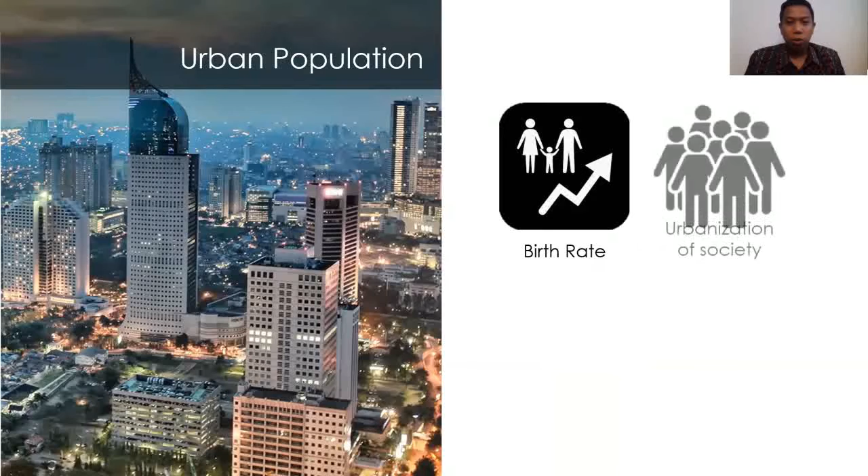Introduction. The increasing quantity of urban population is not only caused by the high birth rate, but also the urbanization of society. With a high population, it will result in an increase in the volume of waste generated from homes. Egg tray or egg packaging is one of the easy-to-find household wastes, which is generally made from recycled paper waste in Indonesia. This condition is due to the highest amount of waste being in the category of paper waste and paper-based waste.

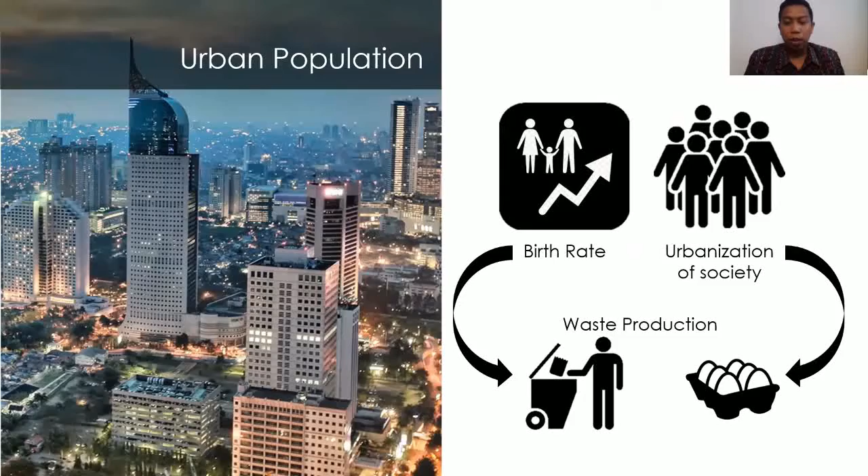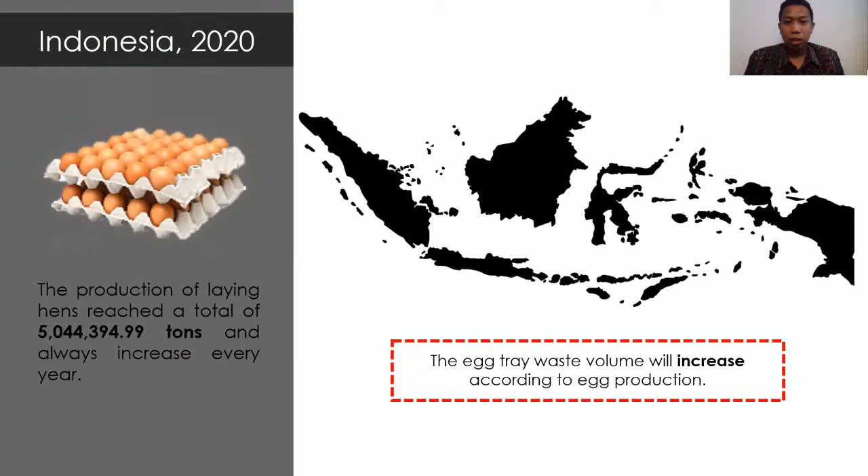Based on data from the Central Statistics Agency, the production of laying hen eggs in Indonesia in 2020 reached a total of 5,044,394.99 tons. This figure does not include the production of native chicken eggs and duck eggs, which also always increase every year. This condition has shown that the use of egg trays will increase based on the demand for egg production, which in turn increases the volume of egg tray waste.

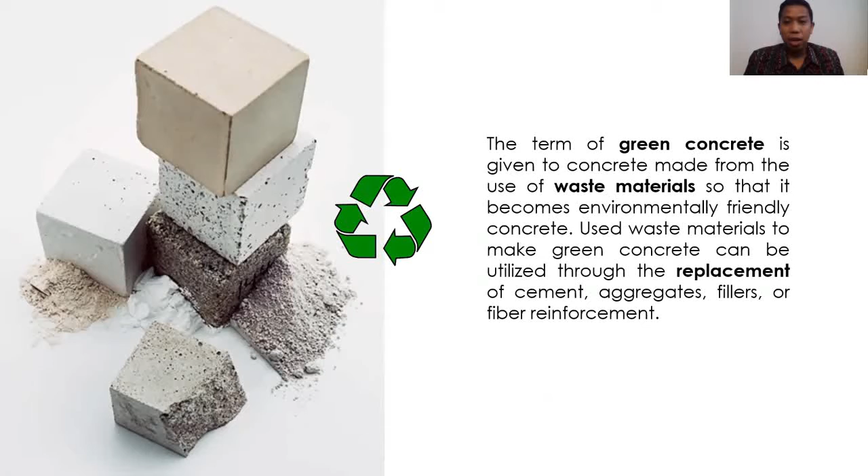The utilization of waste material as construction material has become a special concern, one of which is as a building material for green concrete. The term green concrete is given to concrete made from the use of waste material, so that it becomes environmentally friendly concrete. Using waste material to make green concrete can be done through the replacement of cement, aggregate, filler, or fiber reinforcement.

Methodology. Research and sample testing was carried out at the Material Testing Laboratory, Department of Civil Engineering, Polytechnic Negeri Kupang, using local material for fine aggregate and coarse aggregate, and for cement using PPC Type 1. Egg tray waste used is obtained from household waste as well as from traditional markets. Testing the characteristics of the material is carried out first to determine whether the quality of the material used has met the required specification standard.

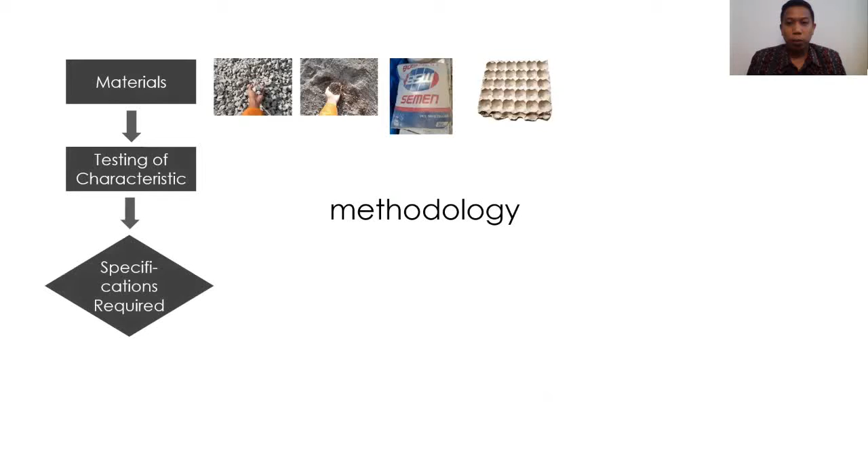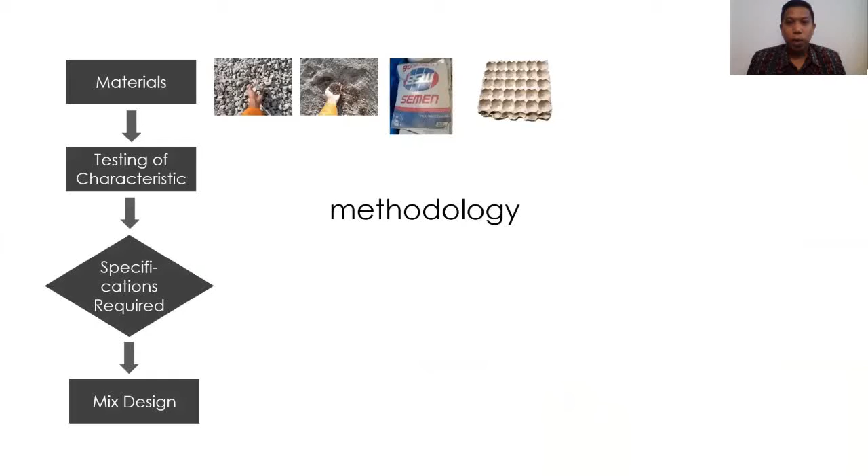Mix design was carried out to obtain a compressive strength of normal concrete with target f'c 30 megapascal. The specimens were made in 4 sample variations for the percentage of egg tray waste, with variation of 0% for normal concrete, 1%, 3%, and 5% for substitution of fine aggregate with egg tray waste. The egg tray waste used is clean of dirt, so that it remains in a clean state, and is made into pulp to be mixed into the concrete. The percentage of egg tray addition is based on the ratio to the weight of the fine aggregate.

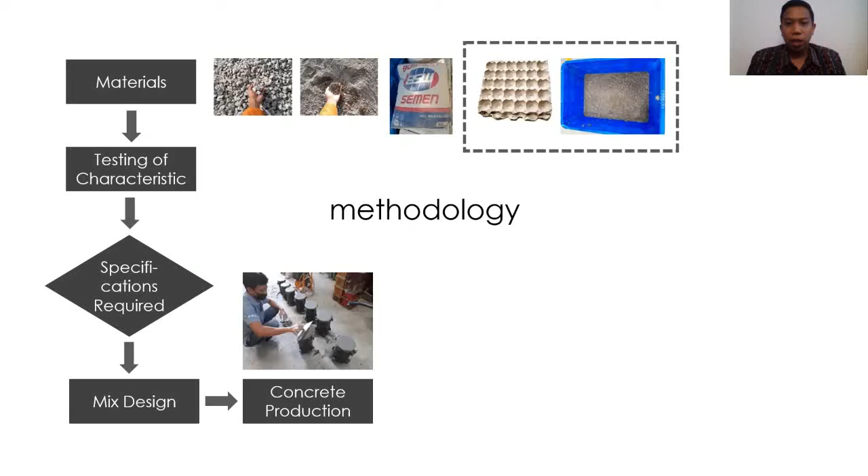Each sample variation was made as many as 8 samples of cylindrical specimens with a diameter of 10 cm and a height of 30 cm. The specimens were given treatment in water 24 hours after production, and the compressive strength test was carried out at the age of 7 days and 28 days. For specimens with egg tray variation, corrections are made to the water requirement based on the moisture content of the fine aggregate and egg tray, because the egg tray must be made into pulp before being mixed with concrete, so that it can mix well and become homogeneous with the concrete.

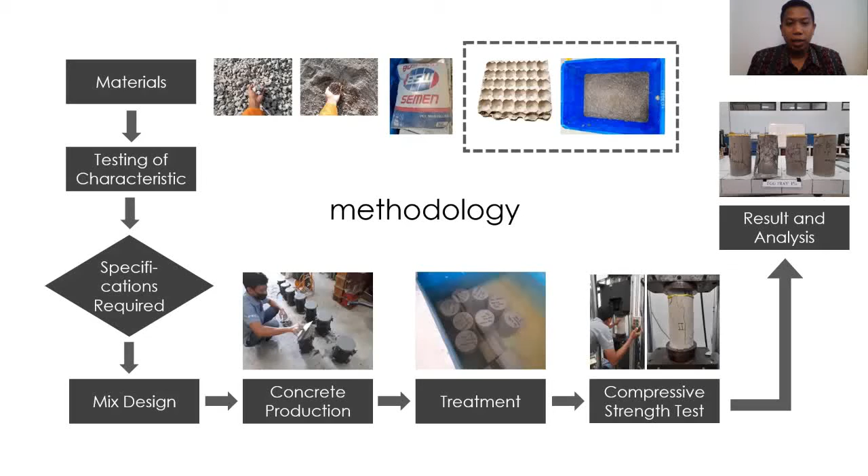Result and discussion. The specimens produced from each variation of the egg tray percentage as a substitute for sand in the concrete mixture show different volumes within 24 hours after being poured into the mold, as shown in figure 1. In normal concrete specimens and the 1% egg tray variation, there is no change in the specimen height, which is still according to the existing mold of 300 mm.

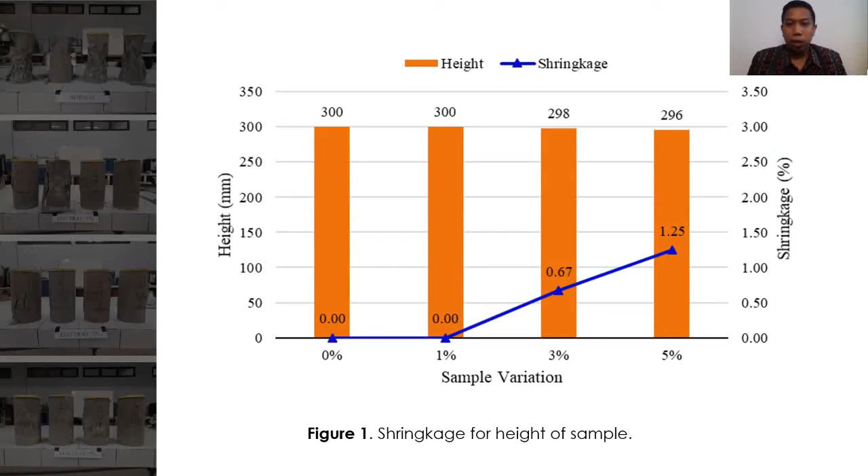However, for variation in the egg tray percentage of 3% and 5%, there was a decrease in the volume of the specimen, which is seen from the decrease in the sample height from the head of the mold. The 3% egg tray variation has an average specimen height of 298 mm, while the 5% egg tray percentage variation has an average specimen height of 296 mm. This shows that in the sample variation of the egg tray percentage of 3%, there is a shrinkage of 0.67%, and it is increasing in the sample variation in the egg tray percentage of 5% with shrinkage of 1.25%.

The partial substitution of fine aggregate with egg tray can reduce the density of the concrete, shown in figure 2. Based on the sample specimen, normal concrete has an average density of 2,418.51 kg per cubic meter. The replacement of sand with a percentage variation of 1%, 3%, and 5% egg tray results in a concrete density of 2,313.05 kg per cubic meter, 2,199 kg per cubic meter, and 2,105.72 kg per cubic meter.

This shows that there is a significant decrease in the specific gravity of the concrete with the addition of egg tray to the concrete mixture. For the percentage variation of 1% egg tray, the specific gravity decreased by 4.36%. And with the increase in the percentage variation of 3% and 5% egg tray, the specific gravity of the concrete decreased by 9.07% and 12.93%.

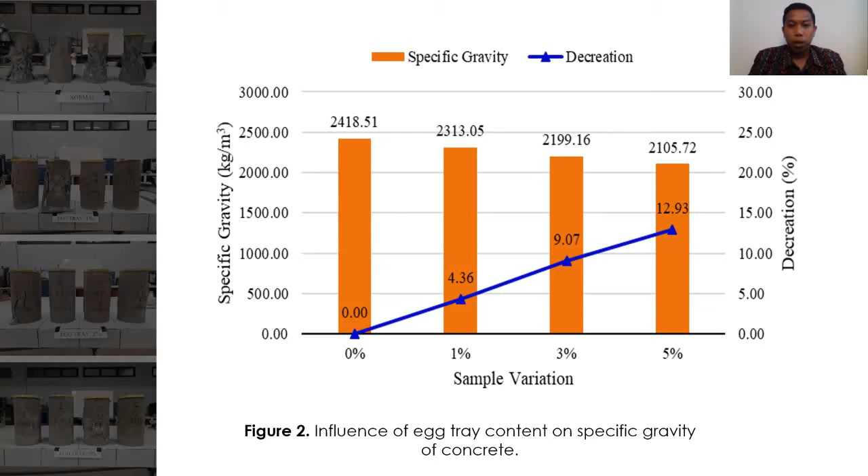Based on the result of testing the compressive strength of concrete for each sample variation shown in figure 3, it was obtained that at the age of 7 days, the average compressive strength for the normal concrete specimen was 28.86 megapascal. The specimens with variation in the percentage of egg tray as a partial substitute for fine aggregate of 1%, 3%, and 5% respectively were 23.95 megapascal, 9.75 megapascal, and 8.64 megapascal.

At the age of 28 days, for the normal specimen, the average compressive strength of concrete is 36.14 megapascal, while for the variation of 1%, 3%, and 5% egg tray, the average compressive strength of concrete is 31.29 megapascal, 14.46 megapascal, and 9.79 megapascal. Generally, there is an increase in the compressive strength of concrete from the age of 7 days to the age of 28 days.

For the normal concrete, the increase in the compressive strength of concrete is 25.22%, while the increase in the compressive strength of concrete is more significant at the 3% variation, which is 48.25%. In the variation of 1% and 5% egg tray, the compressive strength of concrete increased by 30.67% and 13.28%.

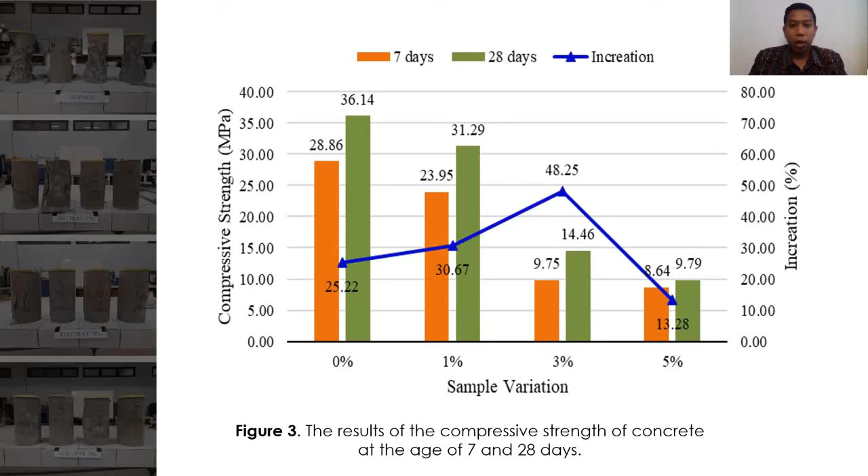Conclusion. Based on the result of this study, it can be concluded that egg tray waste can be used as a substitute for fine aggregate in making green concrete for structural concrete function. With a percentage of replacement of fine aggregate by 1%, the compressive strength value is close to normal concrete, while egg tray 3% and 5% as substitutes for fine aggregate in concrete are not recommended for use as structural concrete. As the percentage of egg tray increases in the concrete mixture, the density of the concrete and the compressive strength of the concrete will decrease.

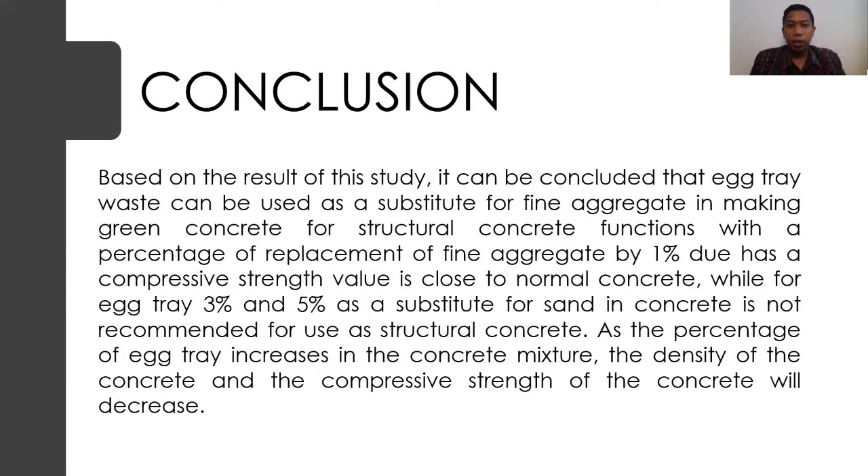Suggestion. Further research development needs to be carried out to determine the characteristics of flexural strength, splitting tensile strength, and modulus of elasticity produced with egg tray percentage variation below 1%.